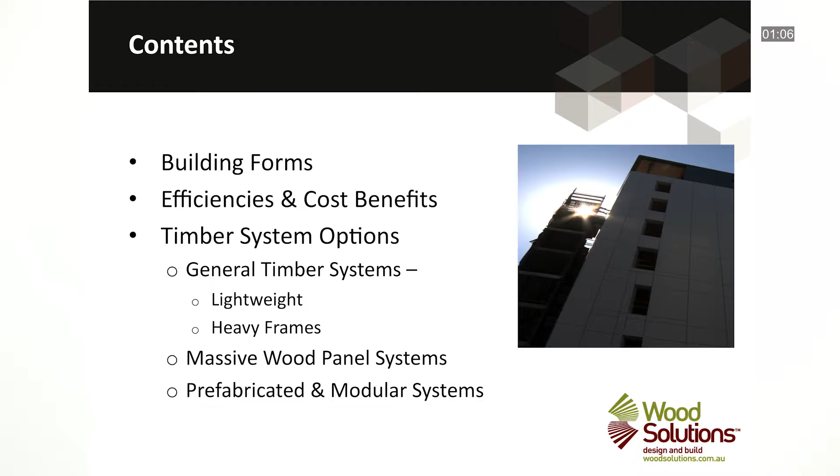In this module, an overview will be provided of the major timber construction products and systems now available in Australia. This presentation will cover the building forms available, the efficiencies and cost benefits of timber construction systems, the different timber system options available, including general timber systems, both lightweight and heavy frames, massive wood panel systems, and also prefabricated and modular timber systems. With timber construction, there are many options.

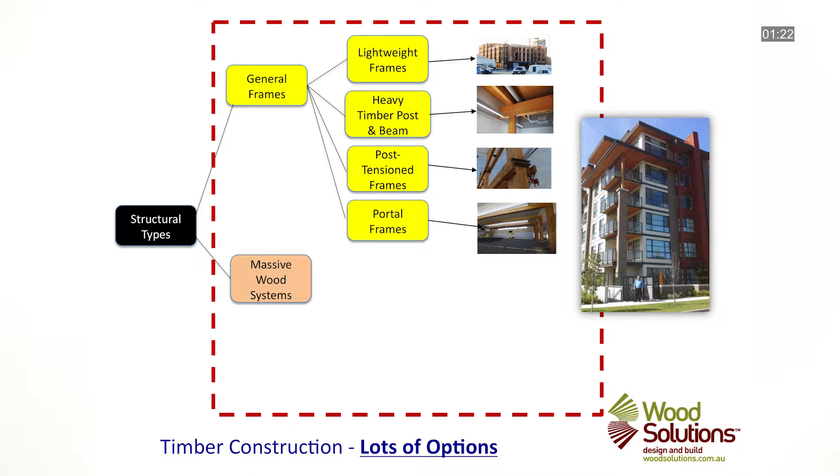These include general framing such as lightweight frames, heavy timber post and beam, post-tensioned frames and portal frames, also massive wood systems, both massive panel walls and massive panel floors, and also modular systems, including fully finished volumetric timber construction. All of these options can be used with mid-rise timber buildings.

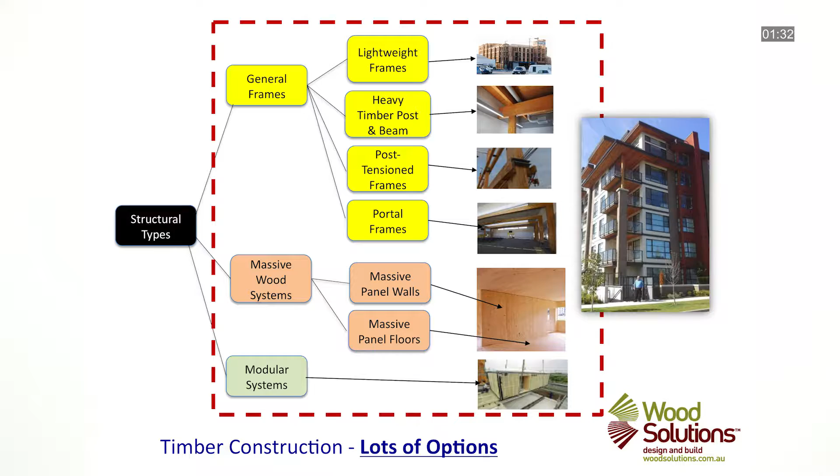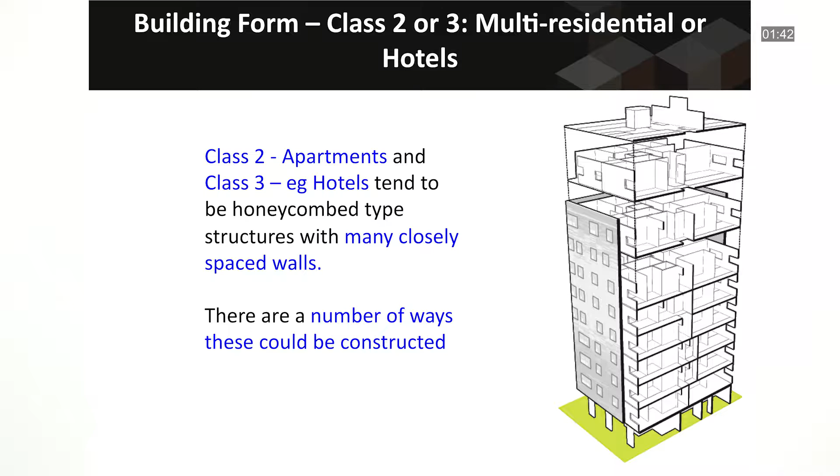Class 2 or 3 multi-residential type structures with many rooms, by their nature tend to be honeycomb type structures with many closely spaced walls and structural load paths, and accordingly there are a number of ways these can be constructed. For multi-res apartments up to 6 stories, these are most economically done using lightweight timber framing, using conventional wall framing configurations in the upper walls, whilst in the lower walls, where there are higher structural loads, the wall stud members can be installed at more closely spaced centres, or larger stud members might be used.

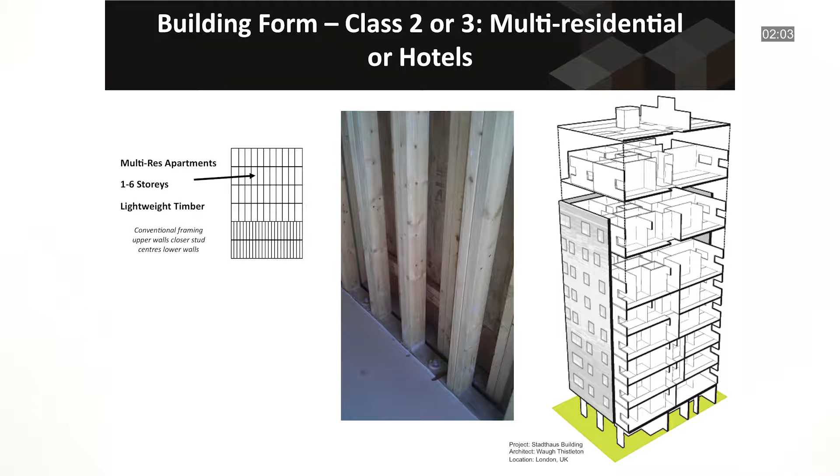For multi-res apartments from 6 to 8 stories, these can be a combination of both lightweight timber frames in the upper stories and massive timber construction in the lower stories. Apartments from 6 to 12 stories or higher can also be built fully out of massive timber construction.

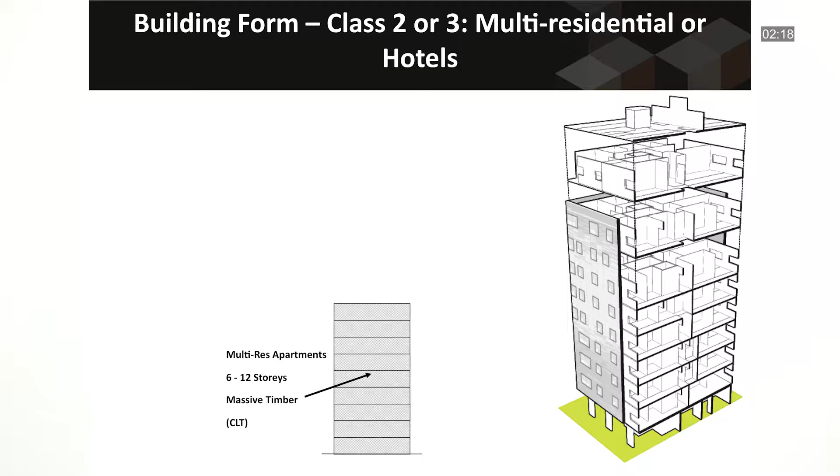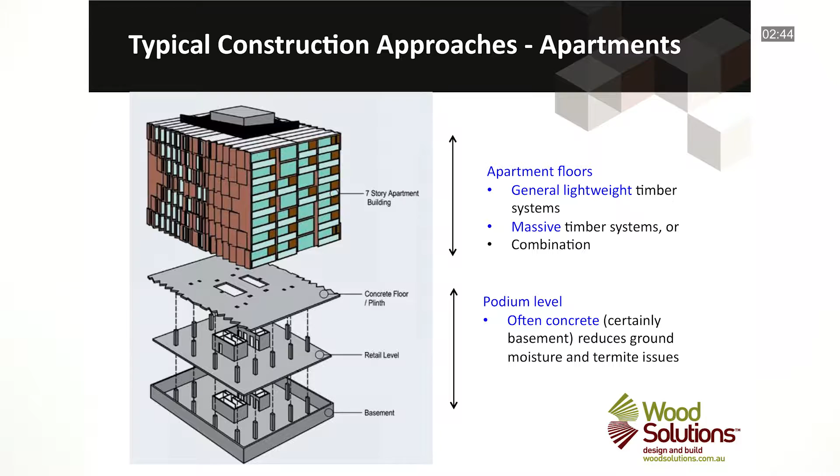With apartments, a typical construction approach is to use a podium level, where the basement, the ground level, and the first level above ground, which is often retail tenancies, are constructed out of reinforced concrete. Above this, the floors can then be all timber, either general lightweight timber or massive timber, or a combination of both. This approach using a podium raises the timber elements above the ground, thereby reducing any groundwater issues and providing a physical separation and barrier against termites if needed.

For Class 5 office buildings, clients usually require a more open type floor plan, and therefore a different building form is generally used, which can incorporate wider spaced heavy timber post and beam members or long span portal frame structures.

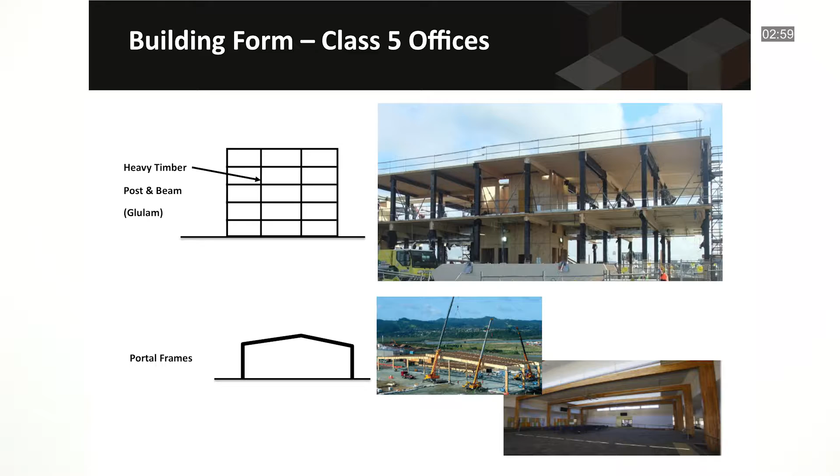Whilst generally building professionals often like to compare materials on a cost per square metre rate, this is not the real comparison that should be made with timber construction systems. The real benefit of the systems can be shown when the comparison is the cost of construction over the full construction period. By example, direct savings can be made from faster methods of construction, particularly when off-site prefabrication is used.

Timber panels are also lighter and can be more easily manipulated and installed. The reduced weight of timber structures also means reduced foundation requirements. Timber buildings tend also to have a lot less occupational health and safety issues. This is particularly the case with a shift to more off-site prefabricated solutions.

There is also the ability for follow-on trades to commence much earlier in the construction process. They can effectively start fitting out the level below as soon as the floor system above is in place. No lost time due to backpropping or slab curing. This can dramatically reduce the overall construction time to completion. There is also significantly reduced on-site construction infrastructure and therefore preliminary costs due to the shorter construction periods.

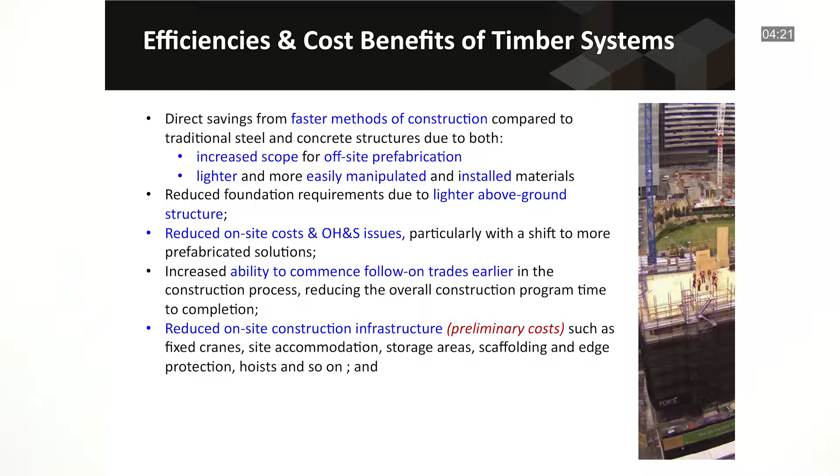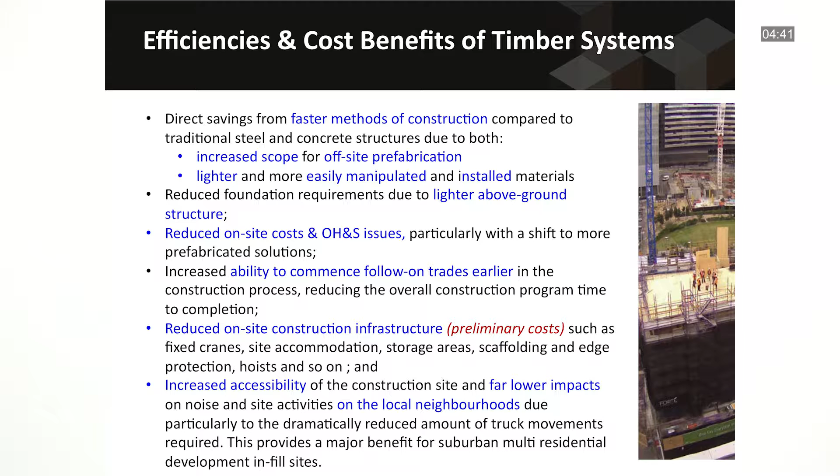Items such as fixed cranes, site accommodation, storage areas, scaffolding and edge protection, hoists and so on. Sites also tend to have much better accessibility and far lower impact from noise and on-site activity on the local neighbourhoods, due particularly to the dramatically reduced amount of truck movements required. This provides a major benefit for suburban multi-residential development infill sites.

In terms of costing comparisons, a number of costing case studies have been produced by Wood Solutions for office buildings, apartment buildings, aged care and industrial sheds. These are available from the woodsolutions.com.au website.

There are also significant environmental and sustainability benefits using timber products. With a global awareness today of the impacts of climate change and rising atmospheric carbon dioxide levels, using wood products from sustainably managed native and plantation forests provides a highly environmentally positive approach to CO2 reduction and storage. Wood, a product obtained from a natural resource that grows on solar energy, converting CO2 to carbon and emitting oxygen that we breathe, it is renewable, recyclable and biodegradable. Its production and processing are highly energy efficient, and its use is greenhouse positive. Sustainably managed wood products are arguably one of the most environmentally friendly materials available.

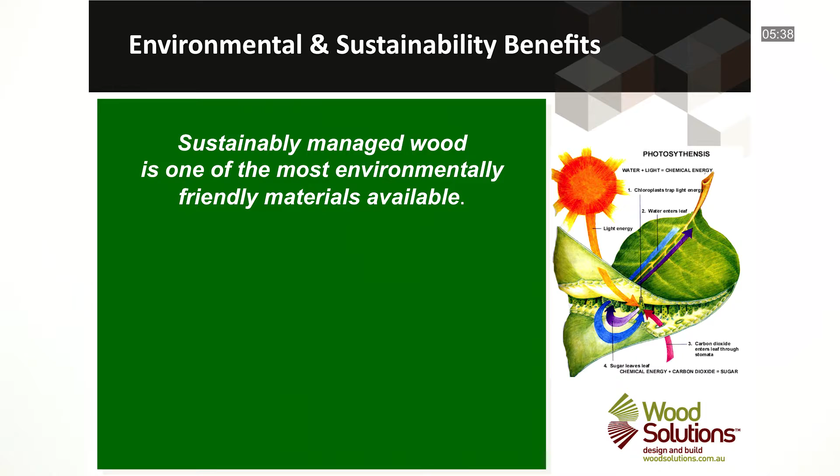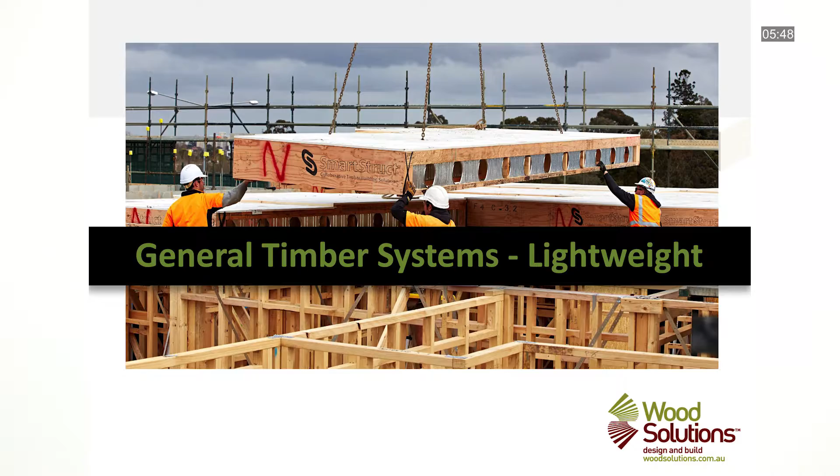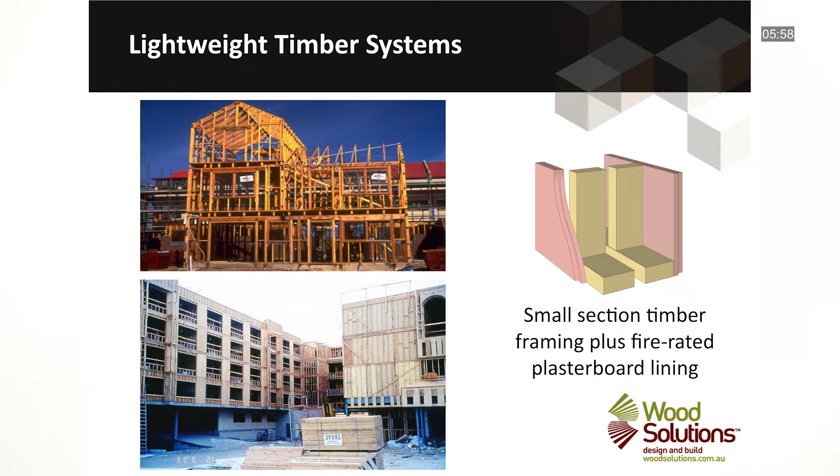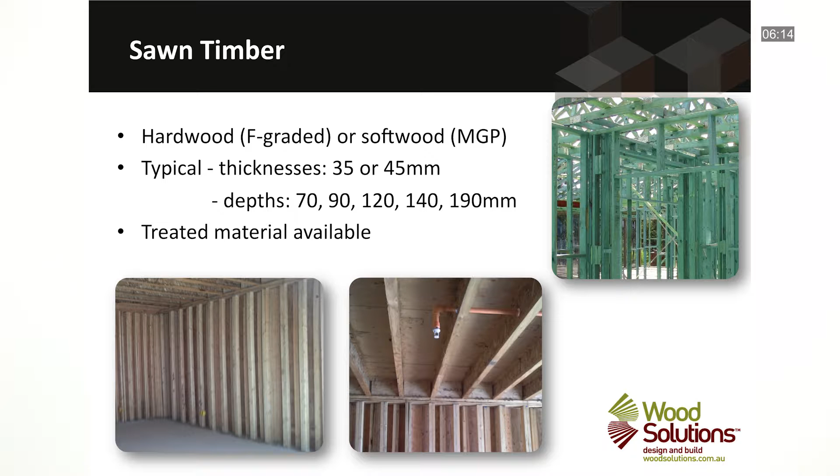So let's now look at the different types of timber construction systems available, starting off as the National Construction Code describes them, with general timber systems, both lightweight and heavy timber systems. With lightweight timber systems, these are generally made up of conventional small section timber framing, which is then fire protected utilising fire-rated plasterboard linings. The most commonly used material is sawn timber, both F-graded hardwood and MGP-graded softwood. Typical thicknesses include 35 or 45 mm, and typical depths are 70, 90, 120, 140 and 190 mm. Treated timber framing is also available if required.

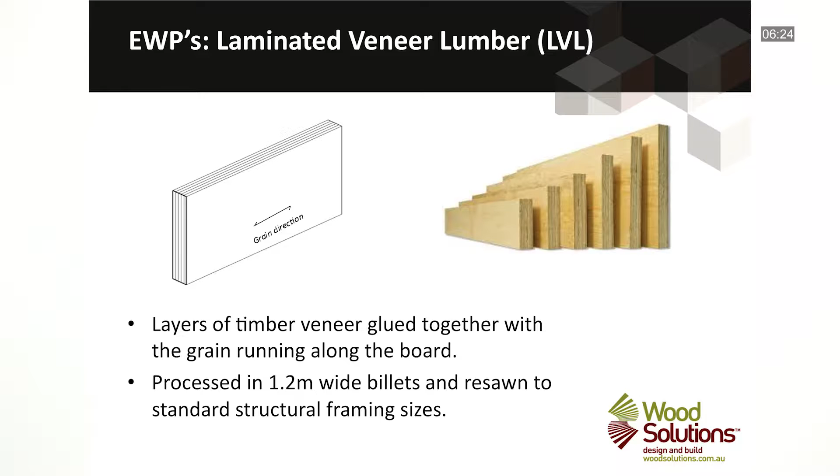Other engineered wood products include laminated veneer lumber, LVL, which is available in a number of thicknesses and a range of depths up to 1.2 metres. Lightweight engineered I-beams are also commonly used in floor joists or in roofs as roof purlin members.

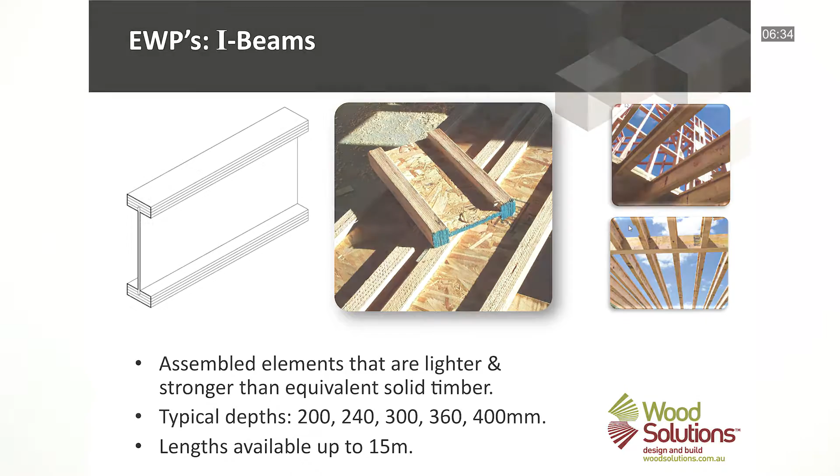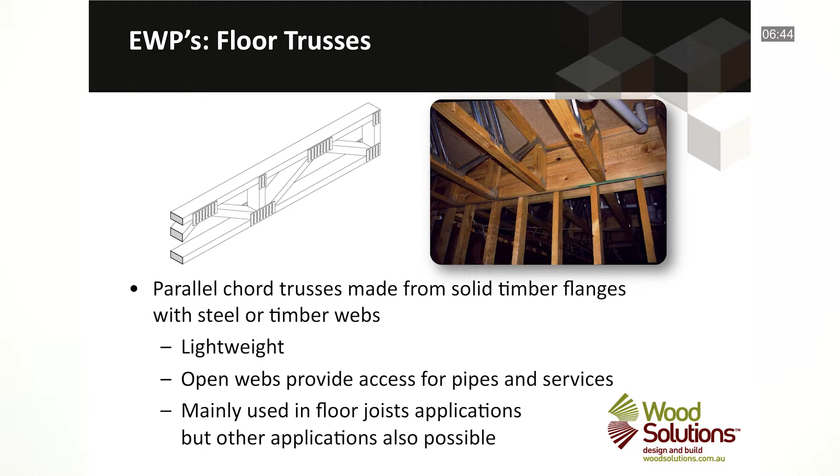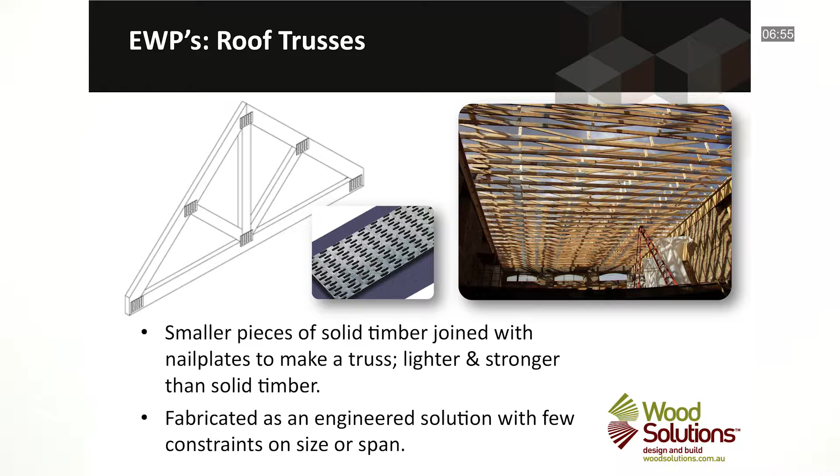Prefabricated floor trusses are widely used as structurally effective floor joists in floor systems. The open webs also allow for easy installation and running of plumbing and electrical pipes and services. Engineered prefabricated roof trusses are also commonly used. They are also highly structurally efficient and can be fabricated with few constraints on size or span.

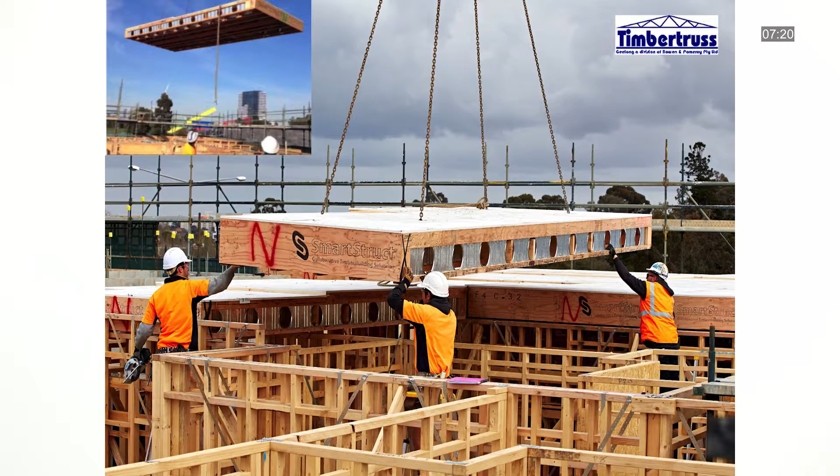One project which provides an excellent example of general lightweight timber framing solution is the Green Project, built in Parkville in Melbourne by Frasers Property, previously Australand. This 5-storey timber project utilised prefabricated timber floor cassettes and wall frames, which provided a particularly fast and efficient construction approach. The timber floor cassettes seen here were all prefabricated off-site and then craned into place. As well as a speedy solution, this approach also provided a much safer working environment for site staff. The builder has publicly reported that this timber construction system provided around 25% in construction savings compared to an alternative traditional reinforced concrete method.

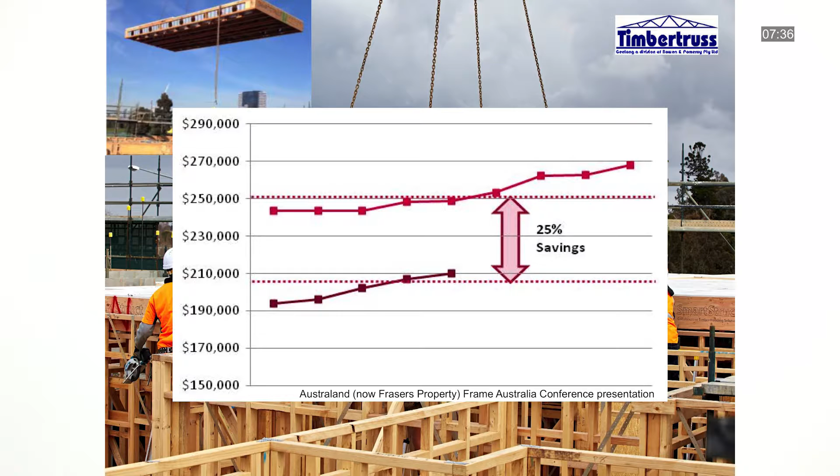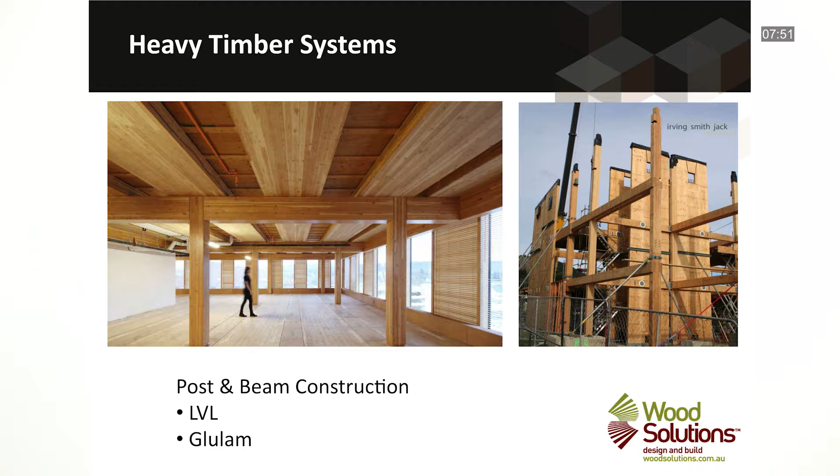General timber systems can also include heavy frames. Typically, post and beam type construction utilises timber products such as laminated veneer lumber or glued laminated timber, often referred to as glulam. Glulam beams utilise small pieces of timber glued together to form larger elements with increased structural reliability. Typical depths range from 90 mm to up to 1 metre deep, and thicknesses range between 40 to 135 mm. Lengths of up to around 18 metres can be obtained, generally available in 300 mm increments.

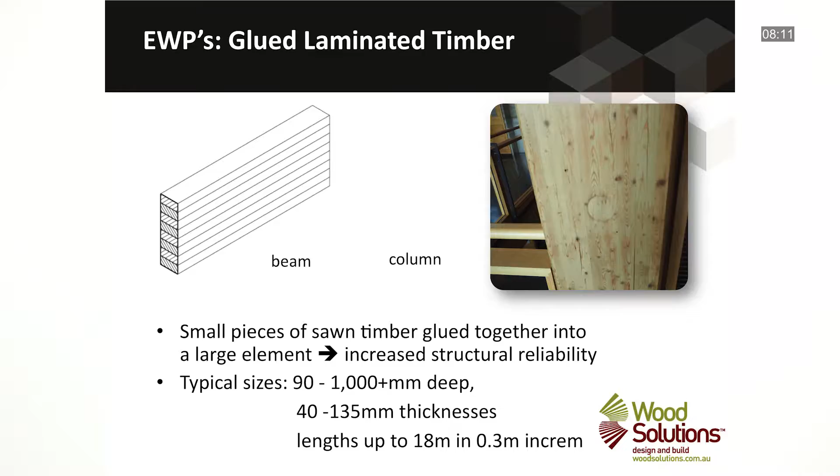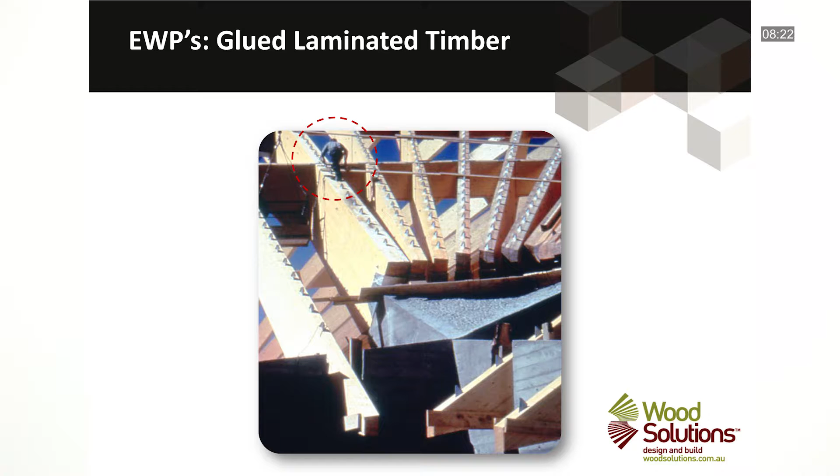The only limit really to the size of a glued laminated timber member is transport, and as this photo clearly shows, very large timber glulam members can be manufactured if needed. Note the man standing on the top of this beam.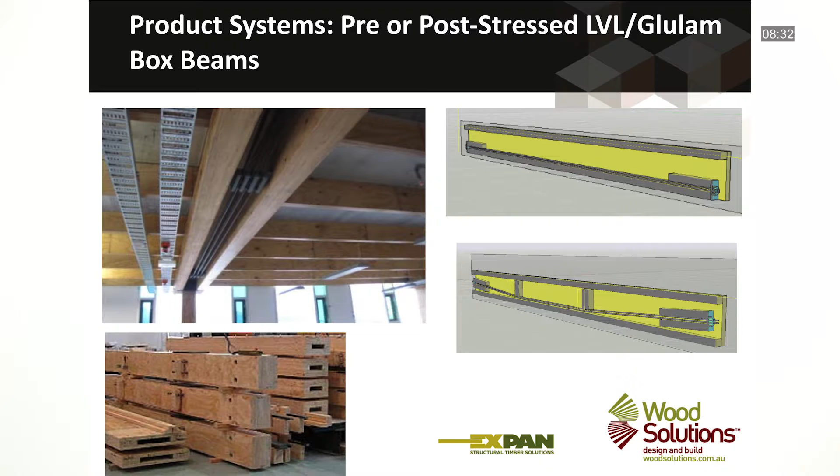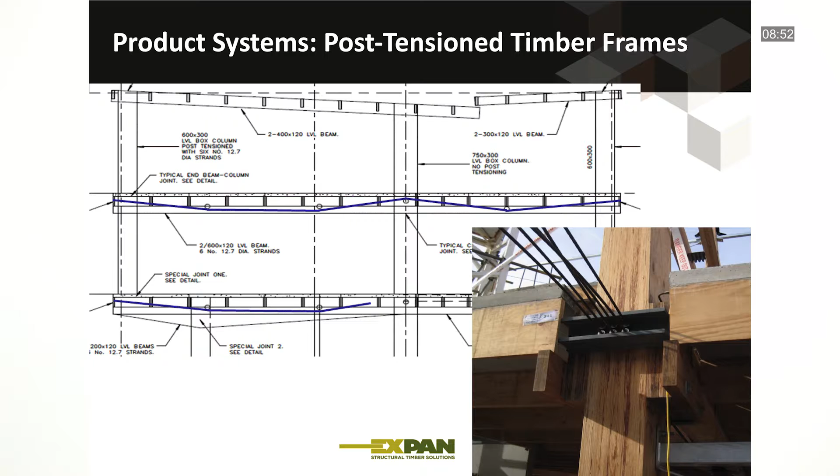Other engineered timber beams can include pre- or post-stress timber beams, using tension steel tendons to improve the structural performance of the members, or post-tension timber frames. These very ductile type structures are particularly useful in seismic zones, where the steel tendons used assist in resisting and absorbing the horizontally accelerated seismic forces. With most earthquake events, the building will remain standing, and these tendons can then be retensioned, providing again a structurally sound building. An exciting new engineered wood product approach globally uses massive engineered wood panel systems.

These can be used for either floor, wall or roof systems. Massive panel construction includes laminated veneer lumber with a minimum 75 mm thickness, cross-laminated timber, or nail and glued laminated timber.

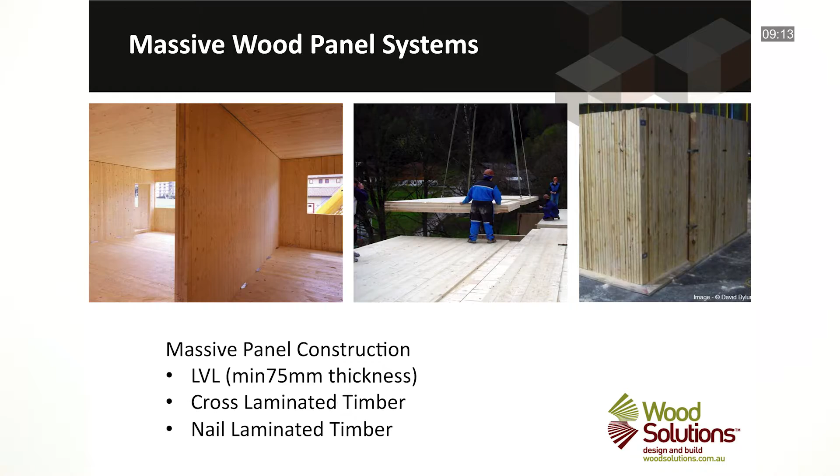Cross-laminated timber, or CLT as it's commonly known, is a similar concept to plywood, but instead of using small thin veneers, CLT uses larger timber elements, with each layer laid and glued at 90 degrees to one another.

CLT panel thicknesses are available between 50 to 500 mm, as cross-laminated timber in Australia at this point is all imported. The lengths and widths available tend to be sizes that can fit into shipping containers, so typically up to around 3 metres wide and up to 12 metres in length.

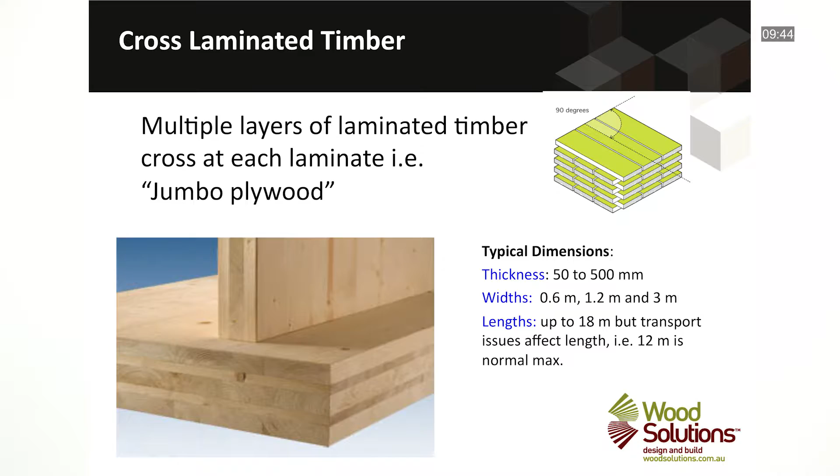An excellent example of a cross-laminated timber building is Lend-Lease's Forte Living Building in Docklands in Melbourne. This 10-storey timber building consists of 23 apartments and 4 townhouses. Whilst the ground retail area is reinforced concrete, all the upper levels are made of cross-laminated timber, including the lift shafts and fire stairs.

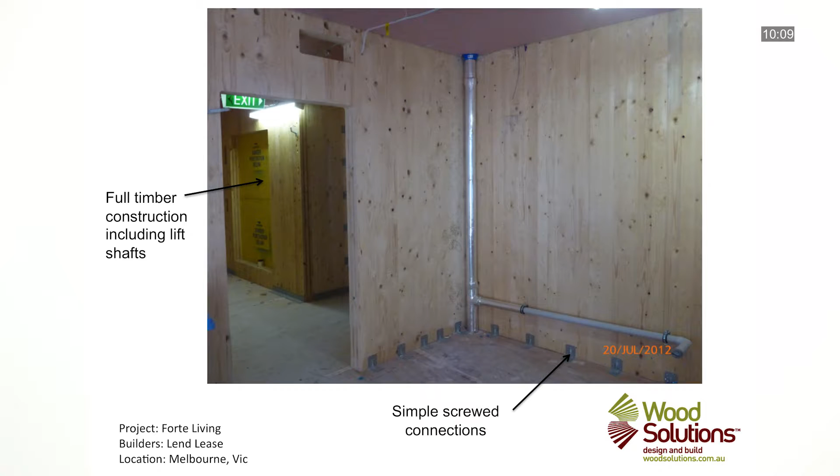As can be seen here, construction is very straightforward, with the timber panels quite simply connected using bearing connections held in place by small steel angle brackets and screws.

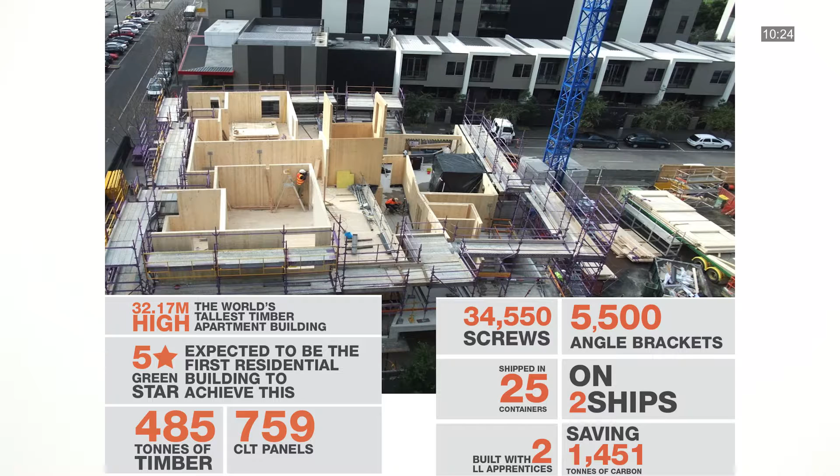This slide provides an overview of the site and some of the job statistics and allows the illustration of some of the particular benefits of this type of construction system over a reinforced concrete alternative. Firstly, the low impact of the site, particularly on the building's immediate neighbours, such as the occupied apartments seen at the top of the slide.

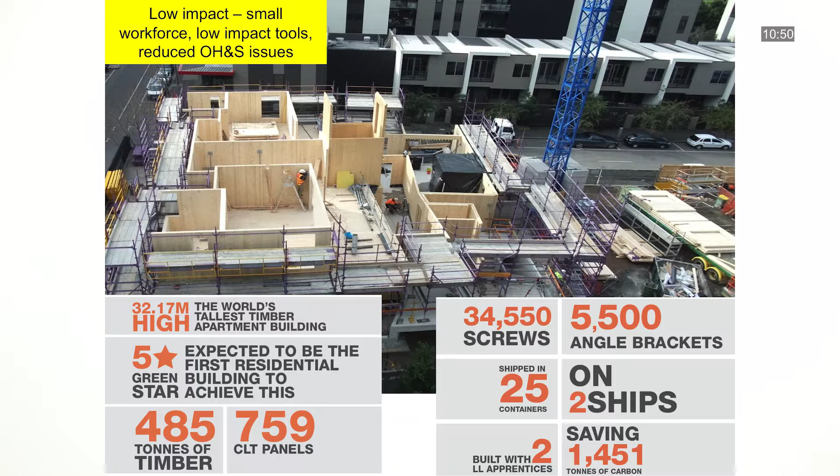In terms of workforce, the building system only needed 4 to 5 full-time workers on site. Construction also only required low-impact tools such as cordless drills. In this job, there were also no recorded OH&S incidents at all, which is a major consideration to building companies and workers. Also, extremely low impact in terms of truck movements, effectively only 1 truck movement per day, loaded with the panels needed for that day.

The system is also very quick to construct, around 1/3 of the time of a concrete building. Also, as the timber is lightweight, around 1/5 of the weight of concrete, this can mean major savings with smaller foundations, and also only the need for a small remote-controlled crane.

Also, environmentally, the building has a particularly low carbon footprint. The use of CLT in this building saved around 1,451 tonnes of carbon compared to a concrete building, a very significant saving. Timber systems today also include prefabricated and modular wood elements.

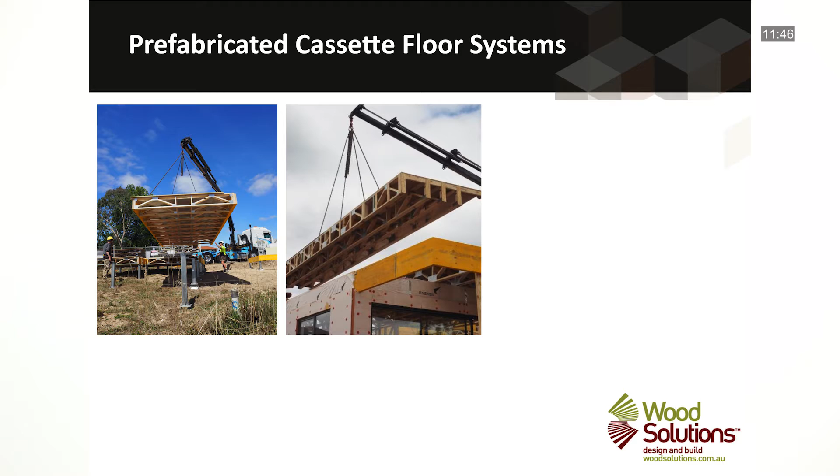These can include prefabricated cassette floor systems for the ground floor or the upper floor construction, as can be seen on these 2 photos on the left. Or they can be used in mid-rise timber apartment buildings such as the Green Project, shown in the photo on the right.

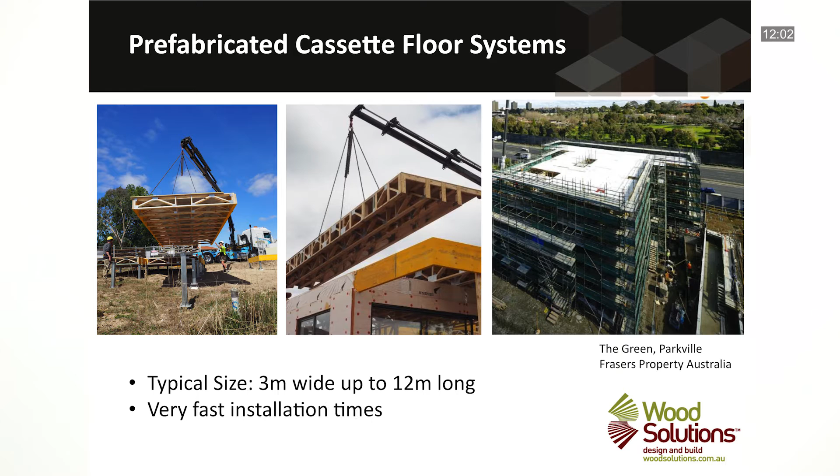Prefabricated cassette floor panel sizes are designed to fit in the back of a flatbed truck and are therefore typically around 3 metres wide and up to around 12 metres long. They provide very fast installation times and also dramatically reduce the fall from heights risk on building sites. So much safer for on-site workers.

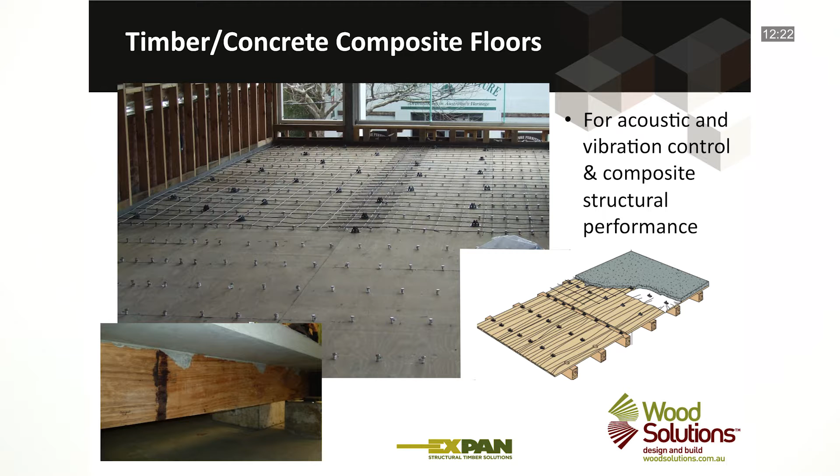Timber concrete topped floor systems are also available. These systems utilise the timber and concrete acting compositely to improve the structural performance of the floor system, whilst the concrete topping also assists in providing additional acoustic and vibrational performance and control.

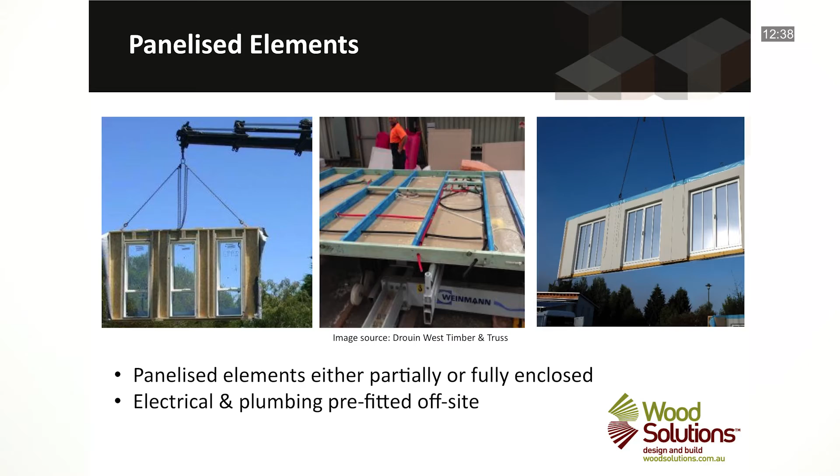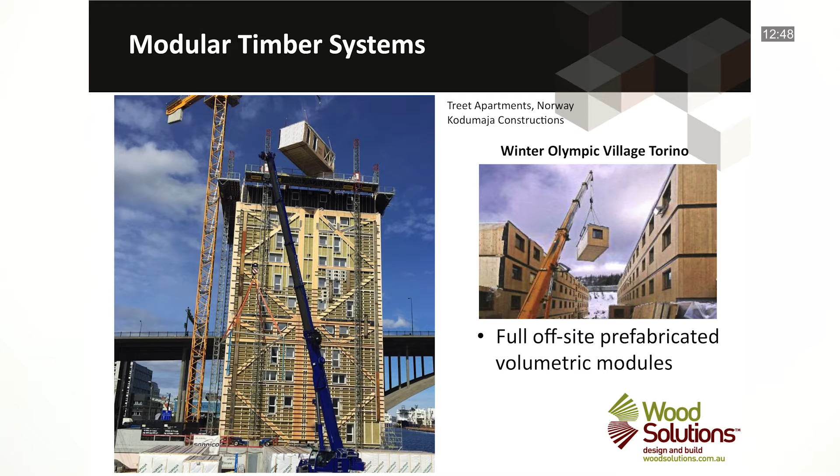And the ultimate in off-site prefabrication, fully modular timber systems are also available, providing fully finished prefabricated volumetric modules that can simply be craned into place.

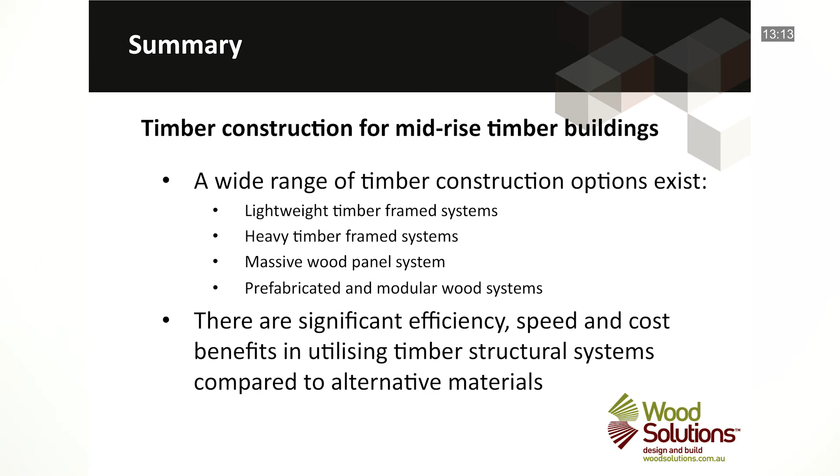So in summary, there are a wide range of timber construction options available for mid-rise timber construction, including general lightweight timber frame systems or heavy timber frame systems, massive wood panel systems, or prefabricated and modular wood systems. These all provide significant efficiency, speed and cost benefits when compared to alternative traditional systems, such as concrete and steel.